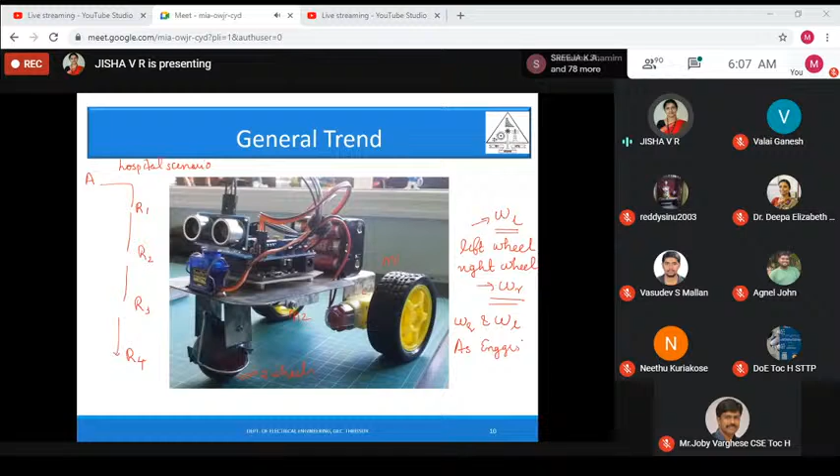As engineers, we should try to drive robots in this way. You should know what the left wheel velocity and right wheel velocity should be, so that we will be able to drive the robot from the start position to the goal position, avoiding obstacles. So if you have to do it in that way, right?

See the tasks, which are the tasks I was mentioning? The first task, wherein I will decide the start point and fix the goal point. Can I design a manipulator which is capable of picking the object from A and placing it at B? Can I design a robot capable of moving through a line or a circle, even though it is not marked by black or white color? Can I move this robot from a start location to a goal location, avoiding obstacles? And can I find what the profile of left wheel and right wheel velocity should be, so that I can reach the respective destinations?

If yes is your answer, then only you need to know all these things. And if you wish to do all these tasks by trial and error, I think, as engineers, we must try to do it in a proper way instead. So that's my thought—you must be able to do those kinds of tasks rather than by trial and error. So if you wish to do tasks in that way, we should know a lot of things.

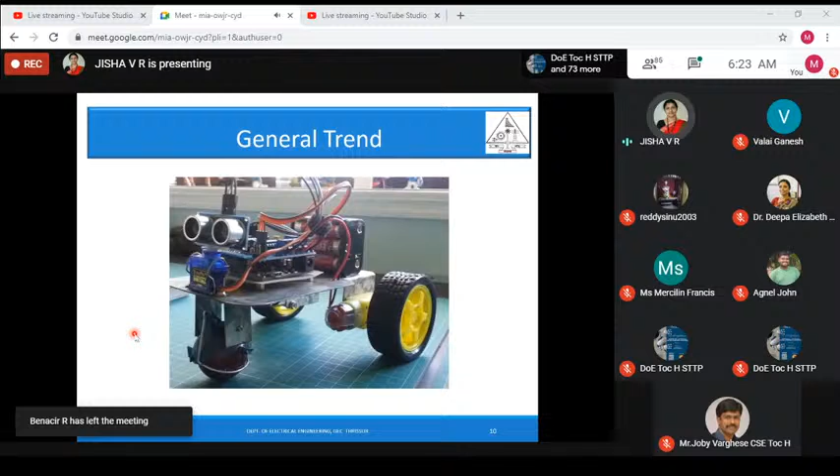It will be the velocity. There are two motors there, so I need to give velocity to the left wheel and the right wheel. So these are the inputs which I'll be giving to the robot, and what will be the output? The output will be X position, Y position, and theta of the robot, right? So in this case also it's like that. So depending on how many motors, those many motors should be driven by - motor speeds will be the input, and output will be the X, Y, and theta position of the robot.

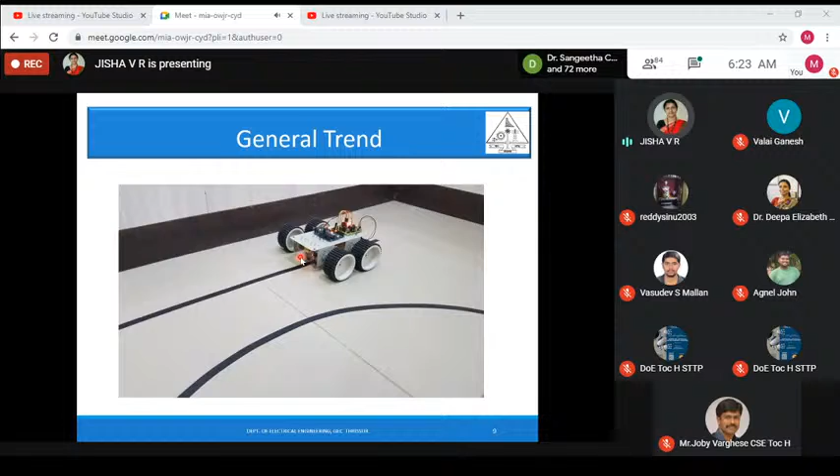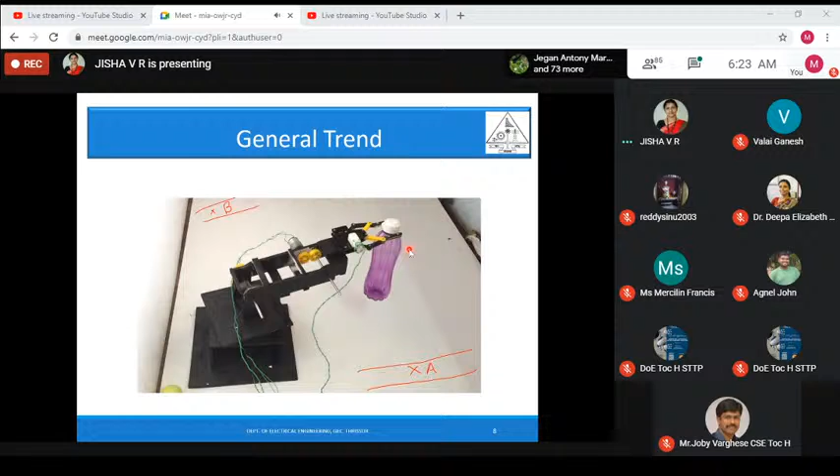So in this case, what are the inputs? How many motors are there? Corresponding to that, you should know what should be the speeds or the position of the joint angles, the motor to be driven, and the required output is actually the end effector position, right? So whatever robot you are planning to design or you are working with, you need to have this kind of thought: which are the inputs, which are the outputs, can I get a relation between these two?

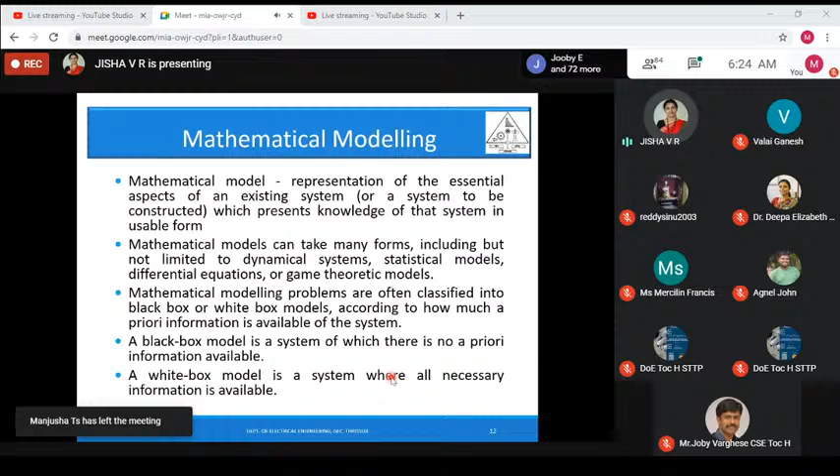Okay, so if you have that question, you will be able to end up with, from basic physics, a differential equation or a transfer function or a state space model. Okay, so maybe I think those who belong to electrical or electronics branches will be familiar with this. I'm not sure whether there are people from mechanical background are also there.

Dr. Deepa, people from mechanical background are also there? Yes, ma'am. Yes. Okay, so they will also be, I'm not sure whether they'll be knowing.

So state space model also, it's actually, you'll be able to represent the system in terms of a set of first order differential equations. That's it. Okay, for example,

Don't think that we need to start with very big equations or complex equations for modeling the robots. We can start with very simple equations.

So can anyone from mechanical say about this? Are you familiar with transfer functions or state space models? Anyone from mechanical engineering? No.

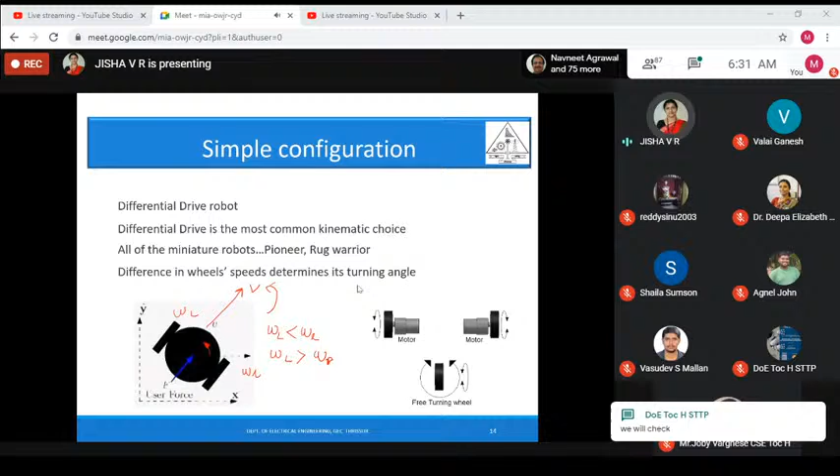So this is a very simple configuration to start with. Once you are confident with modeling this, you will be able to start modeling further. Especially mechanical engineers are very good in the modeling part. This is a very famous configuration used in Pioneer, Rug warrior, etc., and what I'm trying to do is model this robot in a very simple form.

As I was mentioning, you don't need to start with a very complex equation. Just start with a very basic equation which reflects the relation between the input and output. Later you add on to that, and all the effects or the dynamics also you will be able to add to that system.

So what I'm going to do is consider this robot as a point object, just a very simple system which is moving with linear velocity v and angular velocity omega. When I am driving my car in a straight road, it will be having v alone, right? V means the linear velocity.

And when the car is taking a left turn, it will be having v as well as omega. So when it is taking turns, left or right, it will have v as well as omega. If it is having omega alone, it's fully turning on its own. Generally in a car we won't be doing that, so it will have both v and omega.

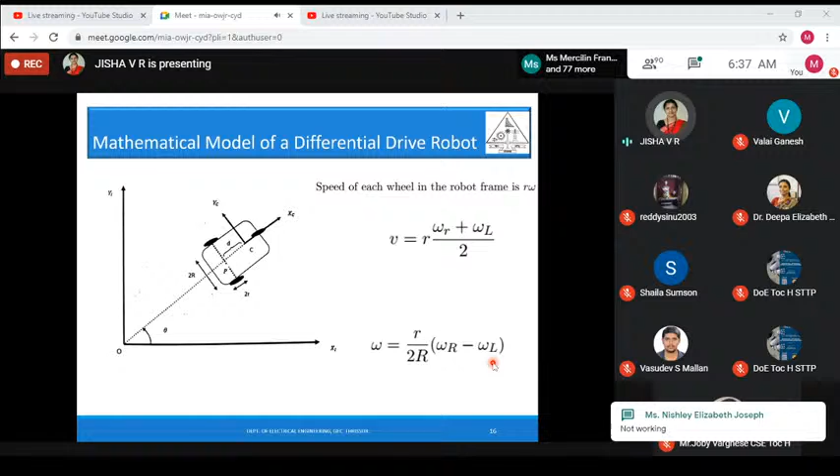Similarly, we need the relation between the angular velocity and the right and left wheel velocities of the vehicle. Applying common sense, the angular velocity will be proportional to the difference in speeds of the right and left wheel velocities. You can derive this from the basic equations directly.

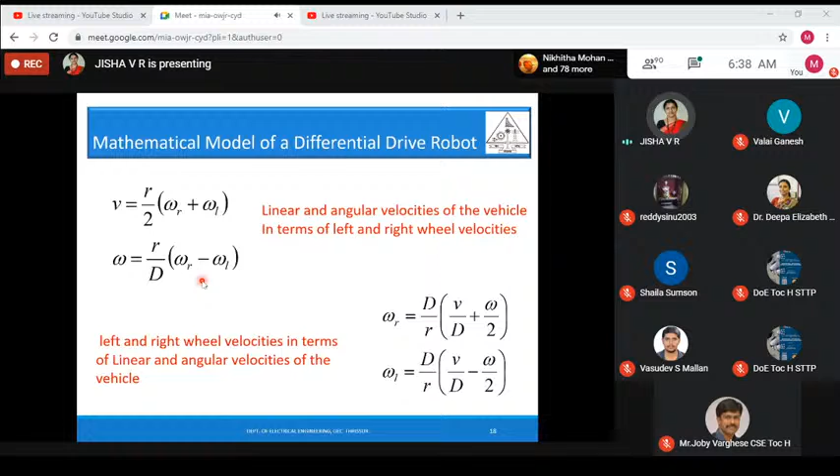So I was trying to get the relation between left wheel and right wheel velocity and the linear velocity of the vehicle, and between right and left wheel velocity and the angular velocity of the vehicle. So I got the relation between them. If I substitute that in this equation, I have the expression for V and the expression for omega. When I substitute, I now get a perfect relation between the inputs and the output. This is what I need to start with — a very basic relation between the inputs and the outputs.

Since this is a very simple example and easy to follow, I have taken it. Ultimately, for any system, you should try to do it this way. For the robot used in a hospital case too, you will be able to use this same relation, wherein to get the desired x position, y position, and theta, you can drive the wheels to the required right and left wheel velocity so it reaches the destination. This is an illustration of the power of mathematical modeling of a very simple robot.

Hope the message is clear. Any queries or doubts? Ma'am, nothing so far, ma'am. Yes, okay.

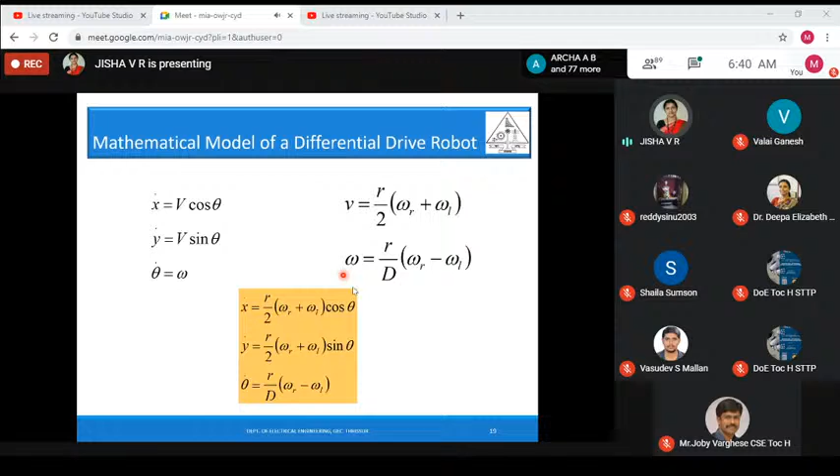Till the last slide, I was just talking about a very simple relation between the velocities — the left wheel and right wheel velocity and the x, y, theta positions of the robot. But in the same robot employed in a hospital, if the payload is more, the payload to be manipulated is more, then you won't be able to work with this model. This is a very simple model which gives the left wheel and right wheel velocities so I can reach the destination. But suppose if the robot is carrying a 10 kg or 20 kg payload, then I may not be interested in this model. I still need the basic part, but what I need additionally is the dynamic model.

So there are different methods to derive the dynamic model of a robot. I'll take a very simple example for dynamic modeling. One of the simplest methods is called the Lagrange-Euler method, which is an energy-based approach. A Lagrange function is a scalar function, defined as the difference between the kinetic energy and potential energy of a mechanical system.

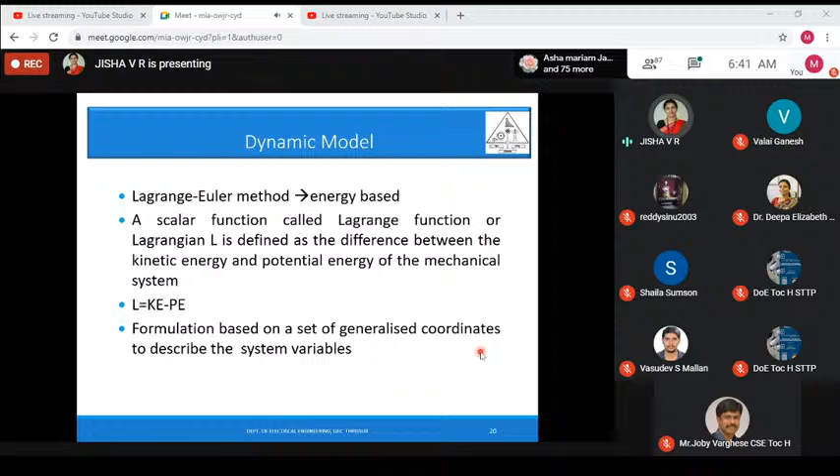Generally, the Lagrangian is defined as L, which is equal to kinetic energy minus potential energy. The formulation is based on a set of generalized coordinates to describe the system variables. So in this case also, this is basically the Lagrange equation.

Once you find the Lagrangian for a system, you find dou by dou q dot of L, so dou L by dou q dot, and then you find d by dt of that. So d by dt of dou L by dou q dot minus dou L by dou q equal to F, which is the generalized forces acting on the system.

What is Q? Q are the generalized coordinates, and if you consider a robotic manipulator, Q means it will be theta 1, theta 2, theta 3, like that. And if you are thinking of a mobile robot, like a differential drive robot, it will be X, Y, theta. So Q means the generalized coordinates, and F is the generalized forces acting on the system. So when you start deriving the model from fundamentals, it will be in this form.

It will be of the form M of Q, because this M of Q will be a function of Q. If you consider a robotic manipulator, at any point of time, that inertia matrix will be dependent on the position of the joints. That is why it is written as M of Q, into Q double dot. So Q double dot means theta 1 double dot, theta 2 double dot, theta 3 double dot, like that.

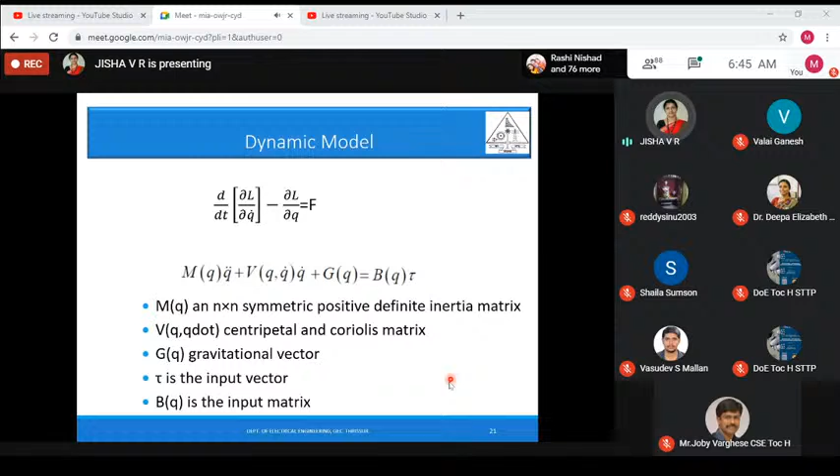So there will be this component, which is called the centripetal and Coriolis force matrix, which will generally be in this form, and there will be a gravity vector and an input vector also, ultimately. So how do we get that in a very simple robot? I am telling you very simple cases because I want to convey this message - this is the way you need to do for any robot. If I start with a very complex case, you will think it's very difficult. So when you start modeling, taking into consideration very simple aspects, you will get a very simple model, and then try to add the complex dynamics into that, so that you will be able to solve that problem and design those systems as well.

So I'm considering the dynamic model of a 1 degree of freedom robot. If you consider, what do you mean by degree of freedom? Degree of freedom means the number of independent movements possible.

If you look at this robot, this is having only one link, and it is having a motor attached to this. So when this motor is moving, this robot will be having a joint angle theta as marked here. That is why it is defined as a 1 degree of freedom robot. This is basically an inverted pendulum model, which we call the 1 degree of freedom robot. So how do we model this? Using the Lagrange-Euler equation, what we need is to find the kinetic energy and potential energy. So how do we find the kinetic energy?

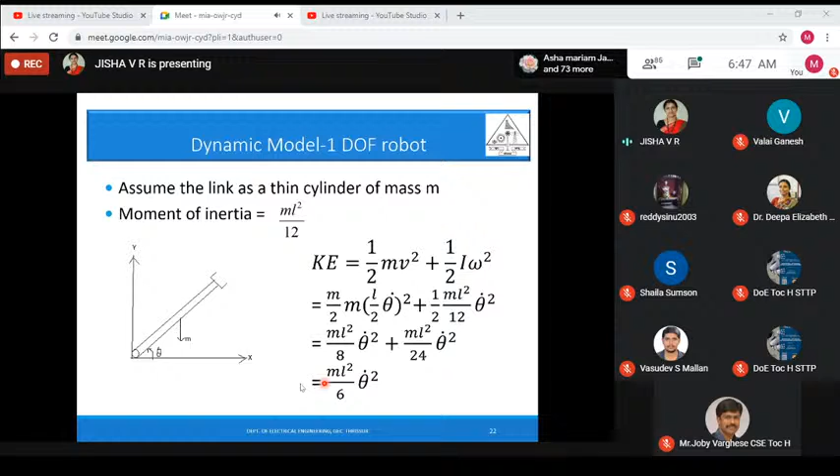When you rearrange, you get the kinetic energy. Similarly, potential energy is mgh, where h is L by 2 sine theta, so you get mg L by 2 sine theta.

So the Lagrangian is kinetic energy minus potential energy. Then you need to apply the Lagrange-Euler equation.

First you need to find dou L by dou theta dot. If it's theta dot square, that gives 2 theta dot. Here theta dot alone is not present, so that term is not required.

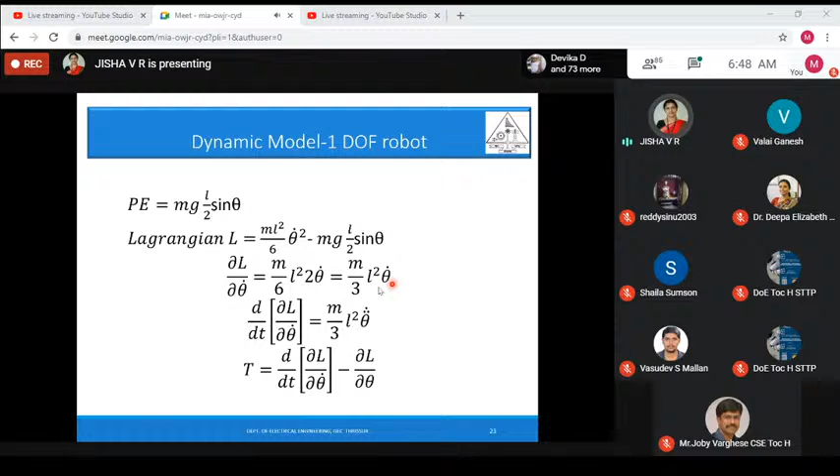You represent it like that, and then differentiate again. When you differentiate, you get this, and finally the expression for tau, giving the final torque equation for the motor.

We have seen this scenario is a 1 degree of freedom robot, having only one motor. So what you got is the expression for τ1, only one torque in terms of all these parameters.

Suppose if you have a 2 degree of freedom robot, that means there are 2 joints, driven by 2 motors. Then you will get expressions for τ1 as well as τ2. And if it's a 3 degree of freedom robot, similarly you will get expressions for τ1, τ2 and τ3. That is the case of a manipulator.

But suppose if you have a mobile robot, specifically a differential drive robot, when we took the kinematic model, the inputs considered are right wheel velocity and left wheel velocity.

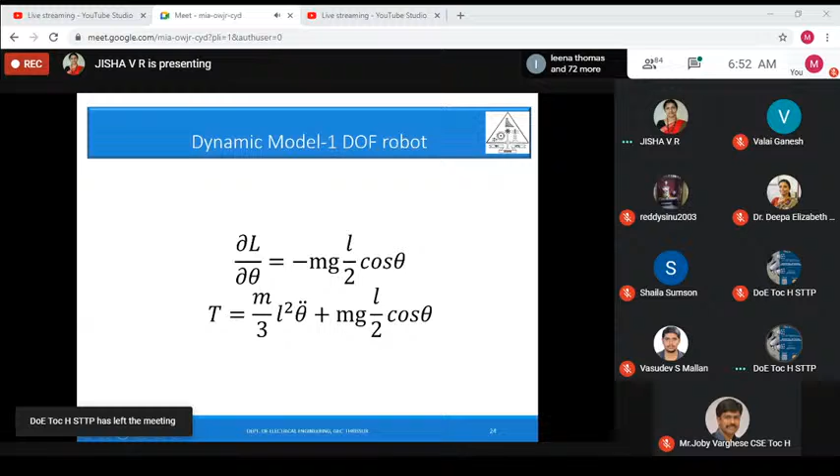When we are studying about robots, once the modeling part is done, I have just taken very simple examples. So whichever robot you are working with, try to get the model in one way or the other.

So once you get the model, the next part which we generally do is the path planning of robots. There is actually a standard definition for path as well as trajectory. A path is a locus of points, either in joint space or Cartesian space, to be traversed by the robot to execute the specified task.

Trajectory means, in addition to this information, the time information will also be given. For example, in this case, it's just locus of points.

Locus of points means, if you consider a differential drive robot, you have a vector position of x, a vector position of y, and a vector position of theta, only that much.

But trajectory means it is actually the x of t profile. You have the x of t profile, you have the y of t profile, you have the theta of t profile.

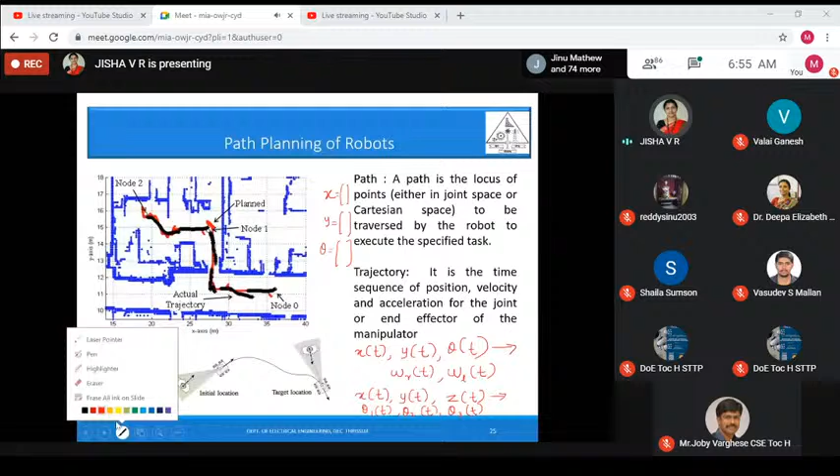So it will be a profile, you should be able to know that. Then only you will be able to drive the robot from the start point to the goal location.

So if you wish to make it autonomous, you need to know the input-output relations represented either as a state space model, a differential equation, or a transfer function, so that you will be able to plan a path from the start point with the desired orientation - from the start point with the initial orientation to the desired point with the desired orientation. You will be able to move that.

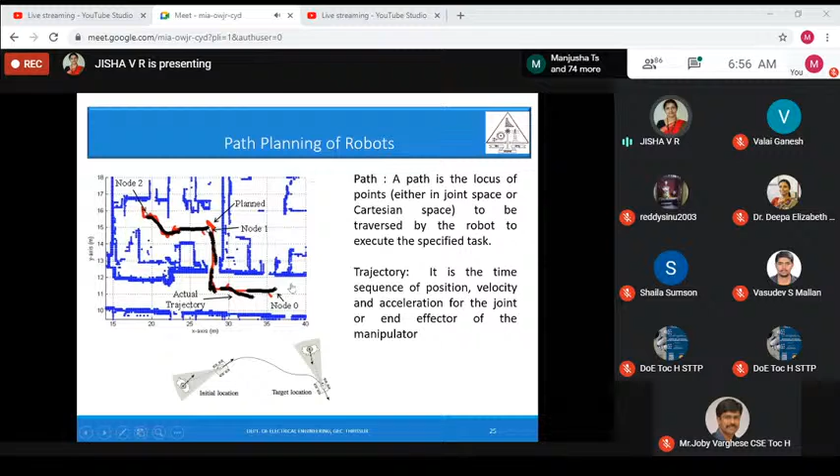So this is actually a path planning scenario where the robot is being moved. In all these cases, the time information is also required. Generally in path planning of robots, the common method which is being adopted is called the Dubin's path, which is used in wheeled robots, UAVs, etc.

Here's an example: imagine your car is parked like this, at this position, and the car has to move to this position with this orientation. How do you achieve this? Just imagine that you are not using the reverse gear, only forward motion.

How do we achieve this? Similarly, when you are moving a robot to achieve these kinds of tasks, suppose the robot is at this position, it has to come to this. Generally we won't think of moving the robot in the backward direction, we'll just assume it's moving in the forward direction itself. So this is one of the options for parking the vehicle like this.

If you look at this, it is taking a circular segment here, then it is taking a straight line path, then taking a circular segment, and it's parking the vehicle here.

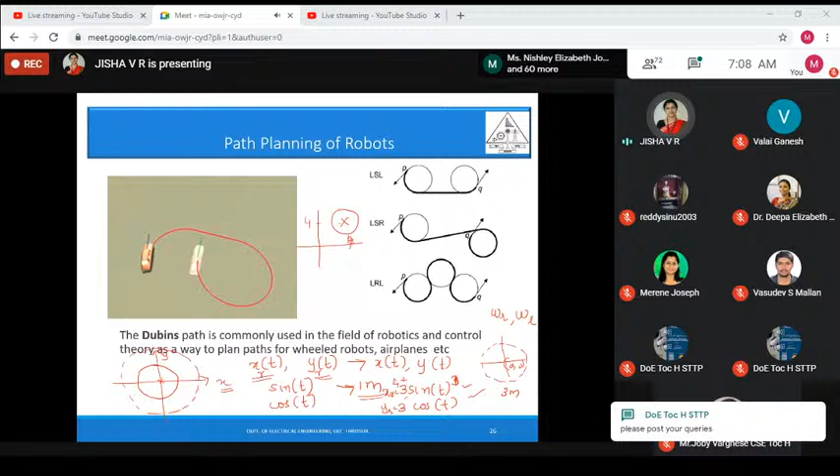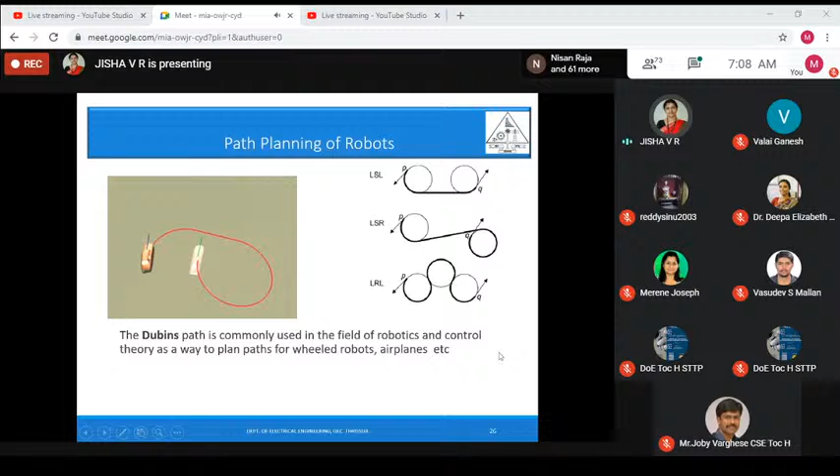So it's just a matter of identifying where the robot or vehicle is to be moved, and what should be the straight line segments. It is easy, you will be able to represent that since you know how to represent straight lines. Similarly, you should know what should be the circular profile, what should be the radius, and where the center should be located. If you know that, you will autonomously be able to drive the vehicle to the desired path.

What I was explaining so far was one method of mathematical modeling. From the basic physics, you get the standard differential equations, and from that you derive the transfer function and the state space model. There are alternate options also, so let me go through the slide.

In order to avoid manual tuning of system parameters, we can use machine learning methods to approximate the physical system. Even though we are modeling systems using basic physics, there are always uncertainties hidden in that. There can always be some noise present in the system, and there will always be some unmodeled dynamics in the system.

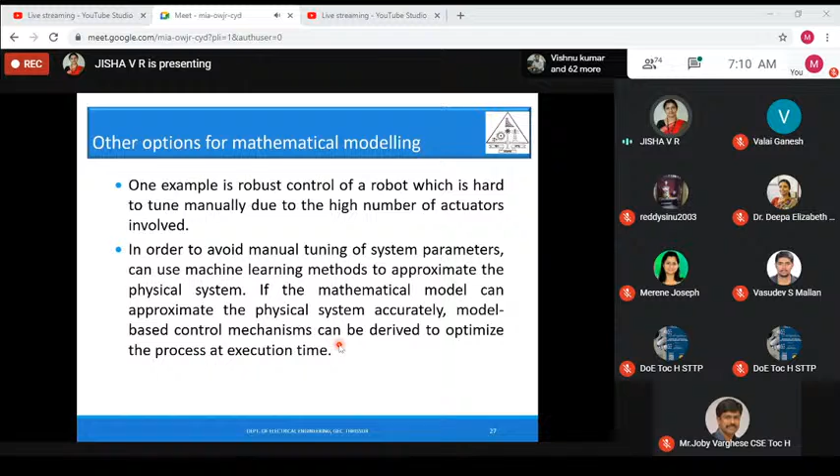If the mathematical model can approximate the physical system accurately, model-based control mechanisms can be derived to optimize the process at execution time. If you have that model, please go with that. But sometimes it may not be the case, it will be a complex system, so then it is better to go with the machine learning based model. What you need to do is have a set of design experiments.

Suppose I have a robot already available to me, or suppose you purchased a standard robot from a vendor and are trying to derive the mathematical model. What you can do is move the robot through random paths or standard paths and try to get a set of measurements. From these measurements, you will have the inputs given and the output positions of the robot. So you have the input-output data, and then you train that model using machine learning, and try to get the mathematical model, or some model, using this method.

Okay, so this is an alternate way of representing the system. Instead of working with trial and error based methods, either try to work with physics-based models or try to work with machine learning-based models. So in a machine learning model, after taking measurements according to the sampling scheme above, the system is modeled based on this data.

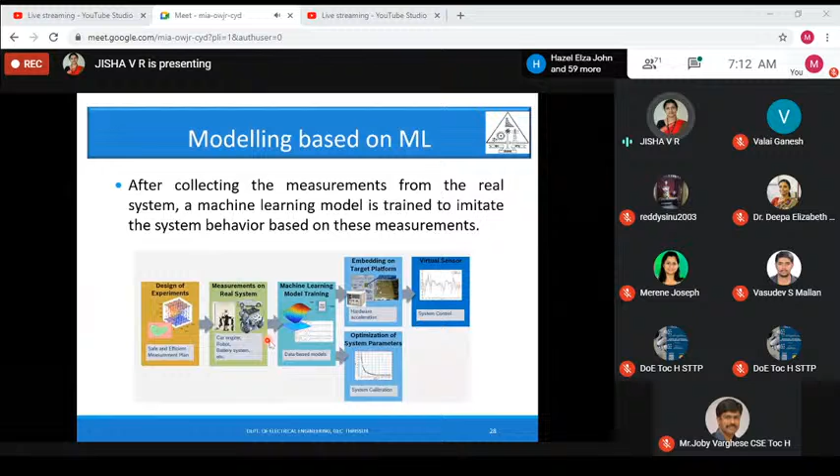Because we cast the physical system as a continuous vector valued function f of x from the system input, you have the set of data as x, and you need to find f of x. So you know what x is given to the system, and you know what y you are getting from the system.

But there will always be some random noise associated with that, which corrupts it as random measurement noise. So you can say that the model you get will be equal to f of x plus epsilon, or whatever variable you give as the random measurement noise. Ultimately, if you are going for machine learning based models, you will be deriving the model in this form, y equal to f of x plus epsilon. So there are many ways in which you will be able to interpolate the data.

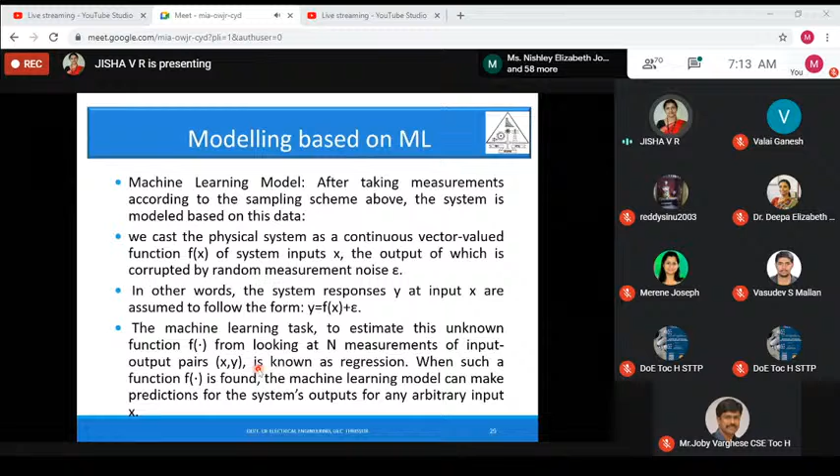And find y is equal to f of x plus epsilon format. I have not worked with this kind of modeling myself, but I know there are people working with this modeling in order to start working with those systems. So those who wish can explore in that domain.

So before concluding, this is actually the conclusion slide of the presentation. If you really wish to design a robotic system, it's always better to start with kinematic and dynamic modeling of robots. Depending on the requirement, if the payload is less and the speed of the robot is very less, then you can go with the kinematics based design method. Or if the payload is high, then you should definitely go for the dynamics based modeling.

And the next part is when we are planning paths, then also don't go for a trial and error based method. Once you have these models, you have the profile for x of t, y of t, theta of t, and try to plan the path for the robot. All these points I have mentioned, and the model can be linear or non-linear depending on the way in which you are modeling.

To start with, maybe you can begin with very simple linear models also, and then once the model is ready with you, you will be able to control these robots so that you will be able to achieve the desired task, which can be implemented with the help of these robotic systems which you are designing or working with.

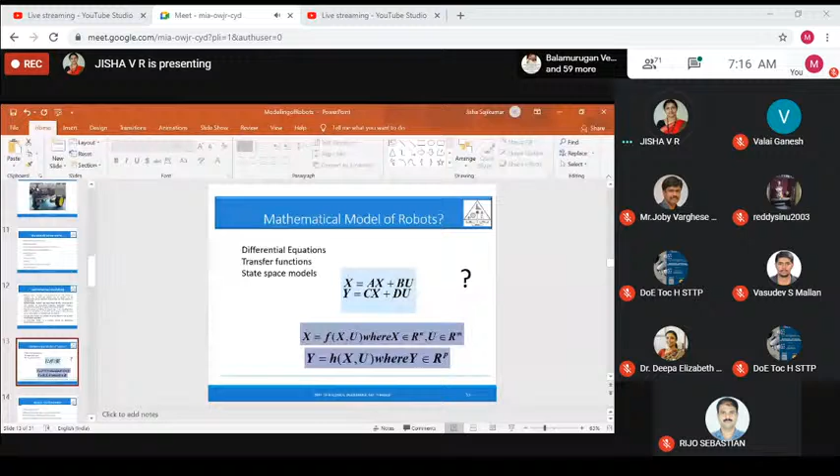Whenever you are modeling, you will start with the basic equation like this, as I was mentioning. For a very simple system, a block like this, which is being moved like this, I'll represent it as m into d squared x by dt squared plus b into dx by dt plus kx equal to the applied force. So this is how we start.

This is one way of modeling the system. This all comes under mathematical modeling only. Transfer function is the second way, wherein I'll represent the same system as the Laplace transform of output. So output x of s by f of s is equal to some model I'll get.

And state space model, this is also derived from the same equation only. Here I'll write x1 dot is equal to x2, and x2 dot is equal to some equation I'll get. If you wish, I can derive the full model, but this is how we do it. All these are coming under mathematical modeling only. State space modeling is one form of mathematical modeling only. That's it.

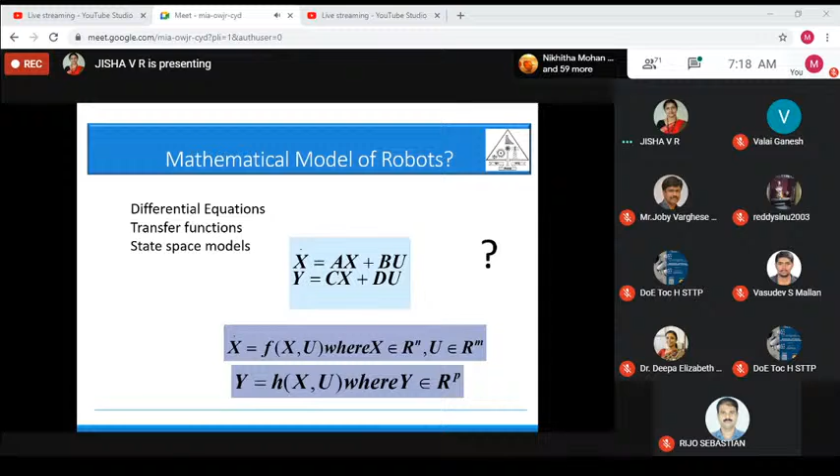In which areas of the industry is the development of robotics currently the most dynamic? What I have seen is that many researchers are working mainly in mobile robots and aerial robots. In industries, manipulators are all kind of saturated now, so the majority of new developments are happening in mobile robots and aerial robots.

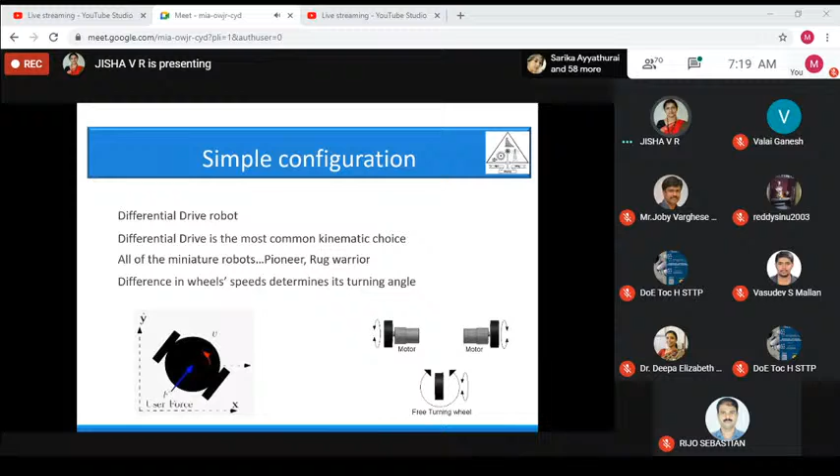Can you suggest some textbooks to know the basics? I am generally following Schilling's textbook, Robotics: Analysis and Control by Schilling. That's the main textbook which I refer to.

There is also a textbook by Professor Saha, who is a mechanical engineer. He has explained the basics very beautifully. That is another good option to start reading or studying robotics.

Do you think robotics would make an impact in the health sector in India? Yes, definitely. Nowadays many people are trying this, for example in Kerala there is a team called Breath of Hope. They are working voluntarily to help doctors, and have developed many products to assist them. It may not be robotics exactly, it can be automation or automated products, but it will definitely have a major impact in the health sector.